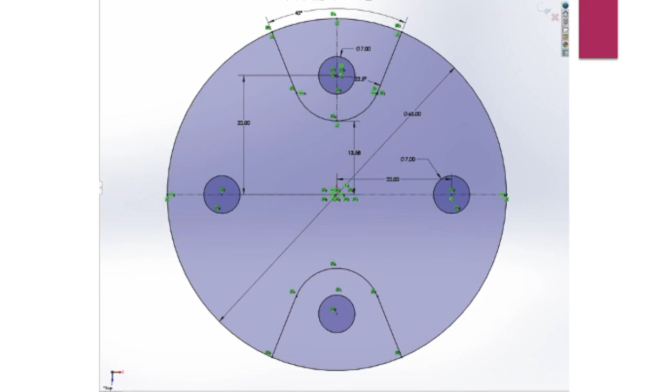So in order to create the part that you see here, I first used sketch to make a circle. I placed down those circles on the left and right, and then I used the mirror tool to copy that shape you see at the top across the center line and reflect it down. And then I took that shape and I extruded it downwards by 3 millimeters so that the top plane of it was level with SolidWorks top plane.

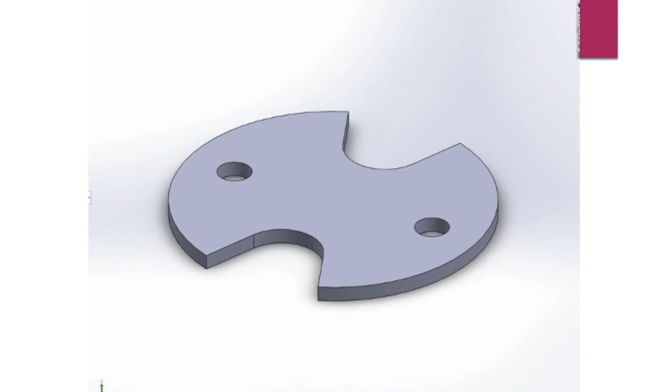So then I was able to just select that top plane and make the next layer of pattern that I wanted, which is the part of the shape that the thin walls of the design that go upwards. So I created that and then I extruded it 9 millimeters in the positive direction. From there, I created a reference geometry and projected that reference geometry 9 millimeters up from the top plane.

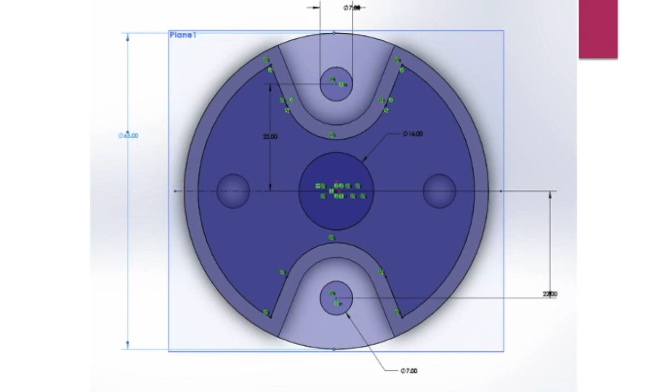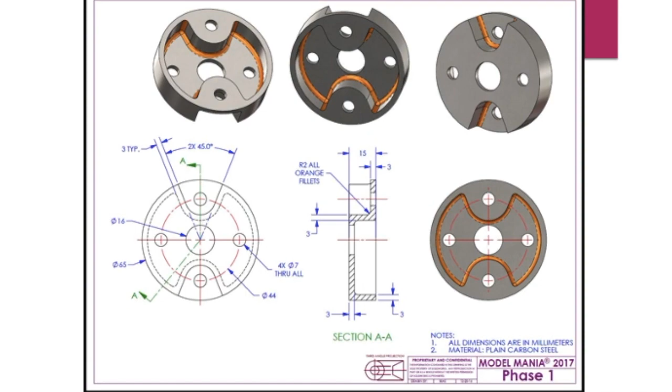And with that, I just sketched the design I would need for the top of the part, which you can see here. I used the mirror tool again, reflecting across the center line, and then I extruded that by 3 millimeters upwards. So with this basic design, I then needed to add the fillets. In the original part model, you can see the fillets are like the orange running along the inside of the shape. So I created these 2 millimeter radius fillets along the inside.

I then changed the material to plain carbon steel. You can't see it on this PowerPoint, but in the final part I'm uploading, the fillets are orange to match the example model. And that was the steps I took to create part one of the Model Mania Challenge. I believe that the strategies I used were fairly time efficient.

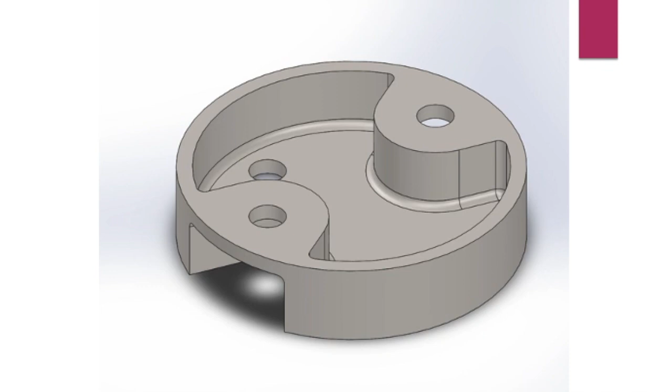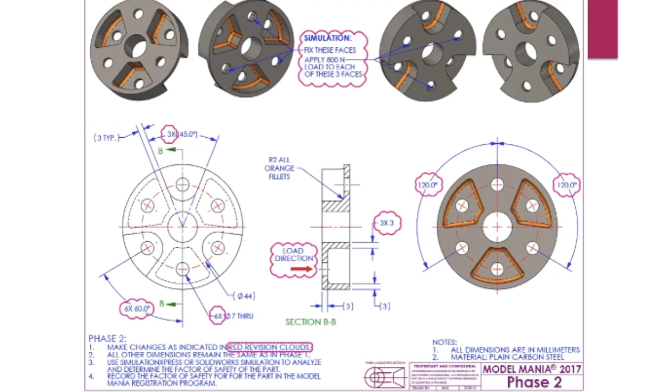I will now be explaining how I modeled part two of the 2017 Model Mania Challenge to get this slightly more complex part shape that you can see depicted here. My process was pretty similar, except I primarily used the pattern tool instead of the mirror tool when duplicating the features that I sketched out. So you can see that here in the first slide. I used the pattern tool to recreate these circular shapes, rotating them about the origin.

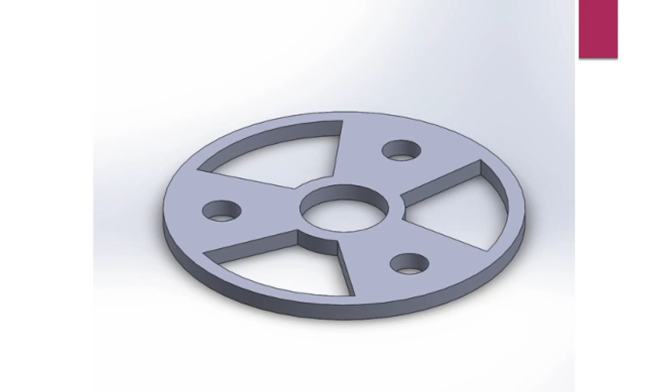And then I used the same strategy before where I extruded downwards by 3 millimeters, and then I took that shape and I created another sketch on the top plane, which you can see the dimensions of here, and I extruded that one upwards 9 millimeters, and that gave me the walls of the shape that I was going for. And then I created plane one, which served as reference geometry against the top plane.

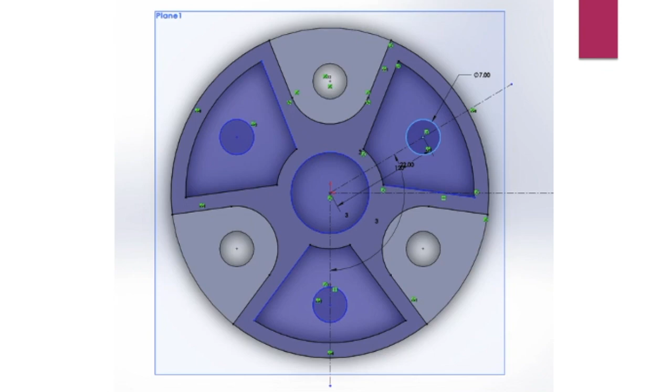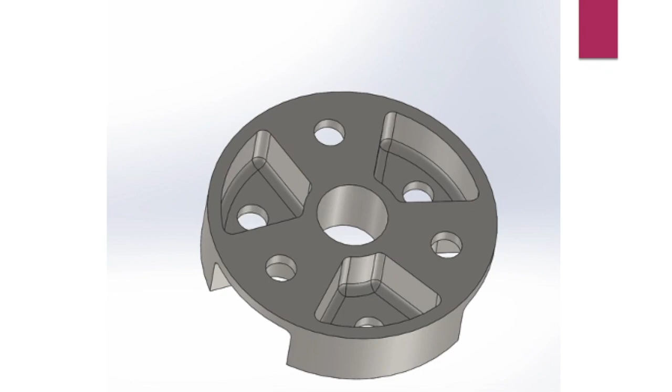And on top of plane one, I sketched the shape I would need for the top of the wheel. And again, I used the pattern tool, the circular pattern tool, to do this. And I simply extruded by 3 millimeters, and this was the final shape I got. I then added fillets, and I changed the material to plain carbon steel. Yeah, so that resulted in the final product that I was going for.

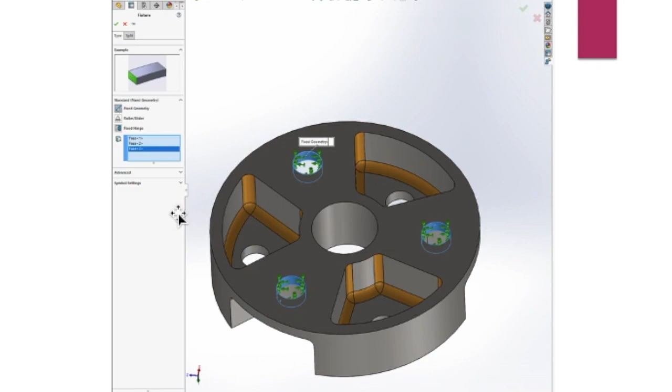This video is just going to serve as a very brief description of how I performed the simulation part of the Model Mania Challenge. So you can see I took part two here. This is what it looks like with the orange lining along the fillets. I selected these 3 holes here to serve as a fixed plane. I then selected the remaining 3 holes, and as the document instructed, I applied 800 newtons of force to these 3 points.